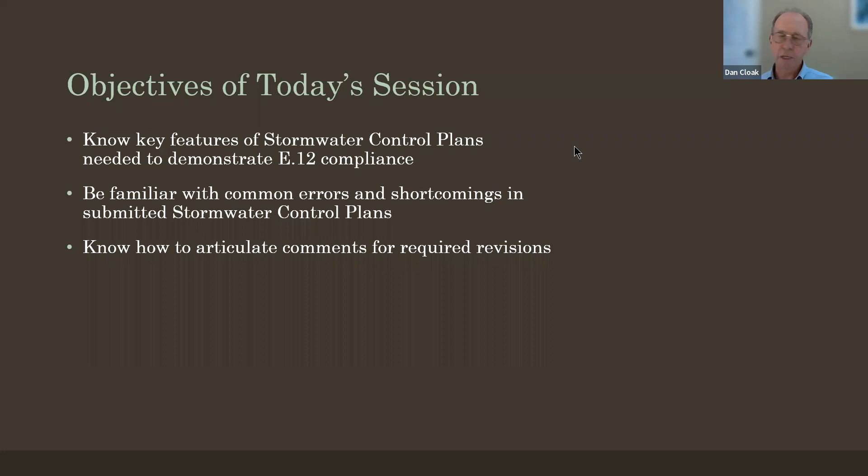So the objectives for today's session: basically know what to expect to get in a stormwater control plan, focused on what are the basic things that you need in order to be able to say, yes, this applicant demonstrated that they'll be in compliance with the requirements in provision E12. We'll review some of the common errors and shortcomings, things that we typically see that don't come up to snuff in stormwater control plans, and discuss some tips for articulating comments in such a way to ensure that they're addressed in subsequent revisions.

So with that, let's get into the manual and resources. And again, any questions that come up, just go ahead and pop that hand up. Someone will alert me that there's a hand, and I'll be glad to interrupt myself and answer questions as we go along.

So the post-construction manual used in all of the 4 North Bay counties was originally produced in 2014. A grant was obtained from the North Bay Watershed Association for the Bay Area Stormwater Management Agencies Association, and the original version of the manual was produced to cover provision E12 implementation, the phase 2 permit, which is in effect in the North Bay counties.

And it's pretty similar in most aspects, with some occasional significant differences, to provision C3 in the municipal regional stormwater permit for the phase 1 counties, which covers Contra Costa, Alameda, Santa Clara, and San Mateo counties. The chapters that are in the manual pretty much cover what's in the requirements.

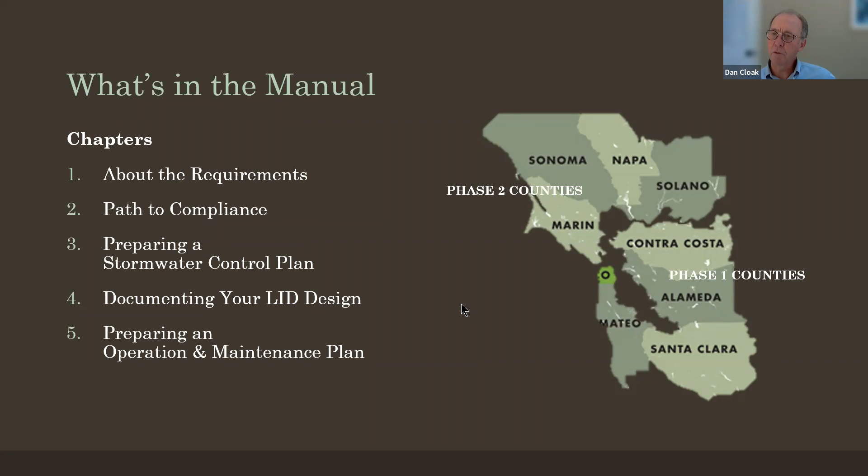Chapter 4 gets into the more technical aspects of how do you show what your LID design is all about. And then chapter 5 is operation and maintenance plan directions. So we'll go over each of those. Chapter 1, the key thing to know, there's really 2 tiers of requirements. For smaller projects, the requirement is to implement runoff reduction measures.

Basically, the 2 key ways of doing that are to disperse runoff to landscape, by far the most cost-effective and usually easiest way, and the secondary way, which sometimes works fitting it into a project site design, is to use some amount of pervious pavement for a walkway or a patio or a plaza. The method of getting to compliance is simply to follow the instructions in the template in Appendix C of the post-construction manual, the plan for a single-family home or small development project.

Larger projects, the second tier, are those that are not single-family homes and that create or replace 5,000 square feet or more of impervious surface. The difference there is that after implementing runoff reduction measures, any remaining runoff from impervious surfaces needs to be routed to a treatment facility, which is just about always a bioretention facility. So that's the key design and construction requirement.

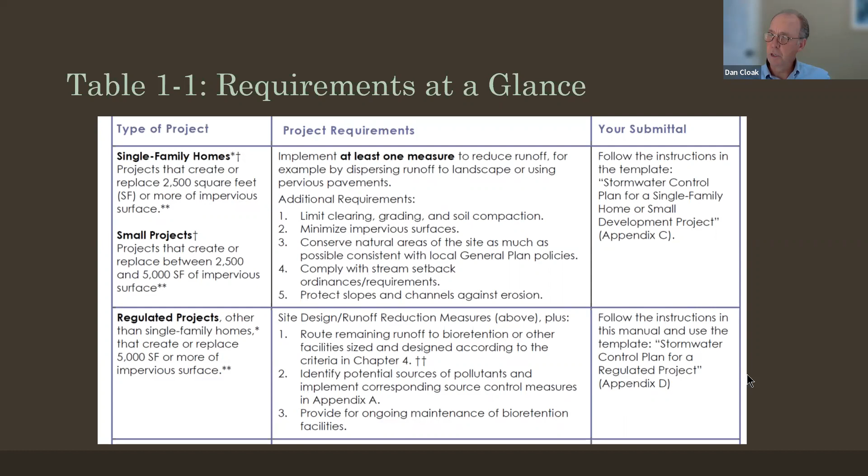There are also the requirements to identify specific pollutant sources and corresponding source control measures, and to describe how maintenance is going to be provided for bioretention facilities. And the method of getting to compliance there is to submit a stormwater control plan for a regulated project in Appendix D of the manual.

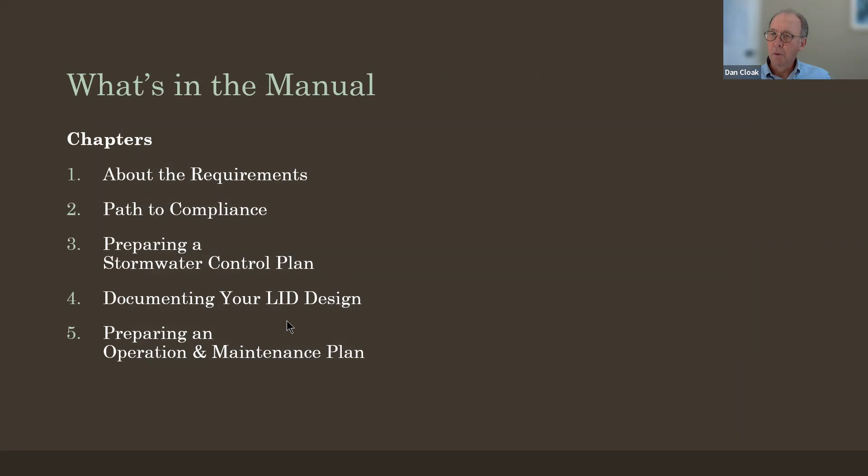Going through to chapter 4, documenting your LID design, the key aspect is making sure that the bioretention facilities are sized correctly, and not just sized correctly, but that there is enough preparation for planning to build these facilities the way they need to be built so they will function properly. The key aspect there is to make the top of soil surface of the facility flat.

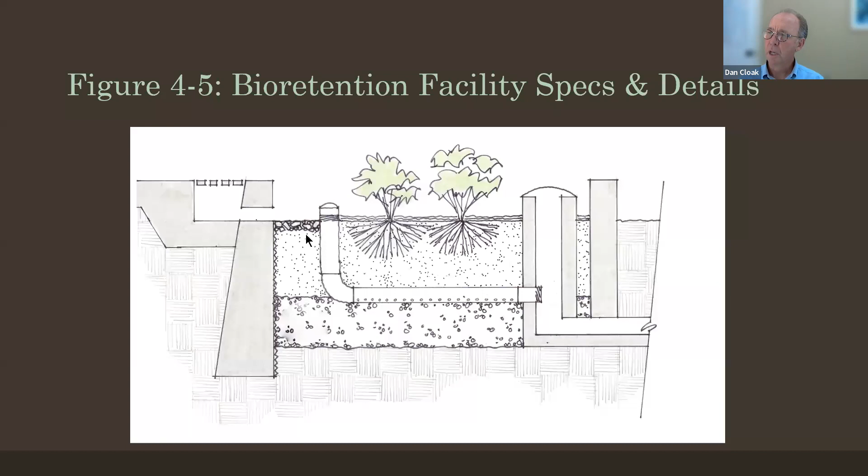This figure in the manual has the basic details and specifications required for that. It's intended to provide just enough information without being too prescriptive to ensure that these facilities function correctly. But at the stormwater control plan stage, particularly when you're first looking at the layout, the question is has the applicant thought through to make sure they've set aside the areas necessary to build these facilities and that they can build them flat.

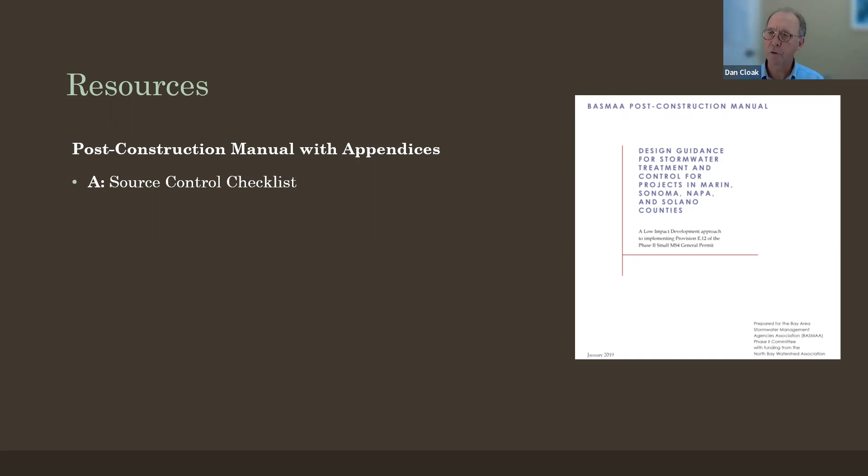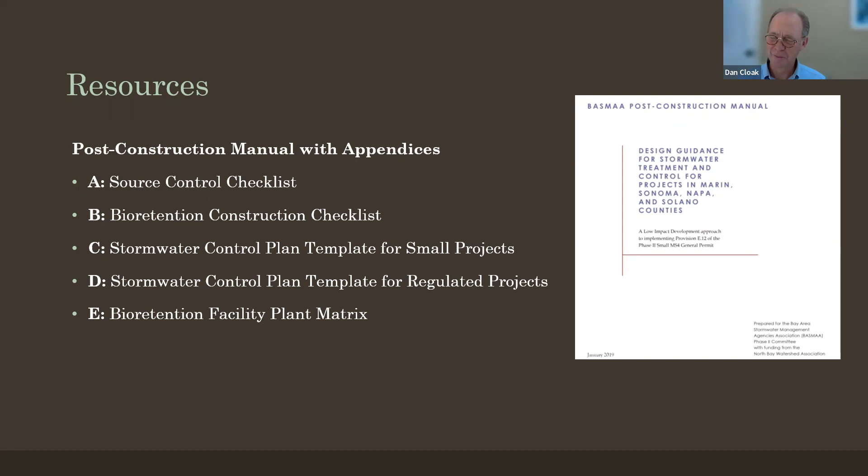In addition to the post-construction manual, there's a checklist that can be used to screen a proposed development site for potential sources of pollutants based on future uses of the site, and for each source, the source control measures that should be included in the stormwater control plan. There's a construction checklist to be followed while building bioretention facilities. There's the template for small projects, a template for larger regulated projects, and a plant matrix, and we already have a question about plants, so we'll be touching on that.

In addition to the appendices, there are resources downloadable from both the Napa program website and the Marin program website to help use the manual. There's an Excel-based calculator. I actually don't know how much that's used, but it's pretty handy. There's a couple of example stormwater control plans intended to provide the level of detail and additional insight into how to put together a stormwater control plan.

For the same hypothetical projects, there are example operation and maintenance plans. There are templates for the operation and maintenance agreement. There's some details on technical criteria for non-LID facilities for the very rare projects where those are appropriate and allowed. And there's an inspection checklist for bioretention facilities.

Do we have any questions yet?

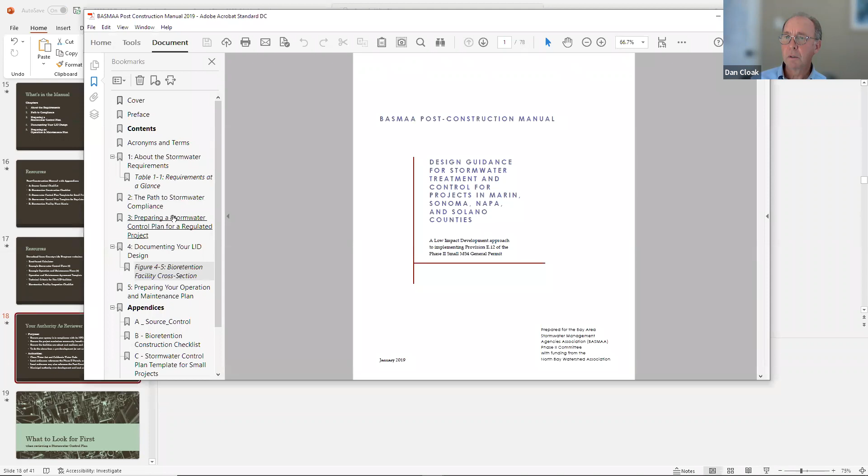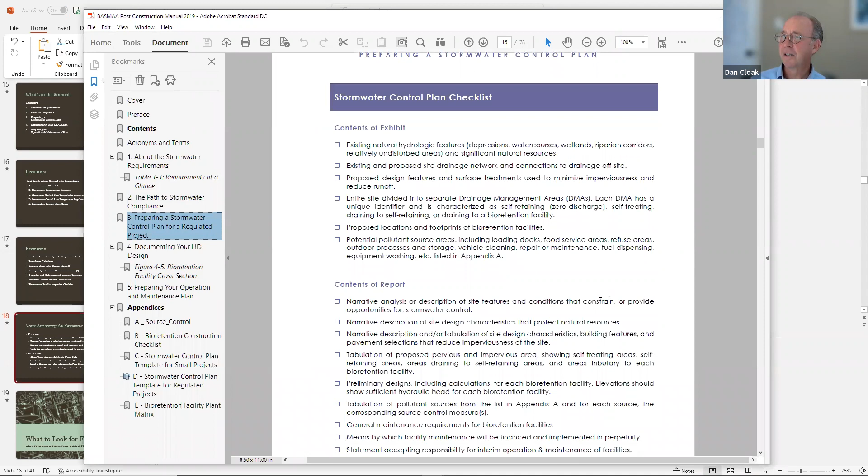Right, but I think there's a checklist for what's in the plan as well? Yeah, I think Appendix A is the source and source control checklist, if that's what you're referring to. Second here. Let's see here. Here, yes, this checklist. That's what I was referring to. Everyone see this? So this is on page 3-2 of the manual.

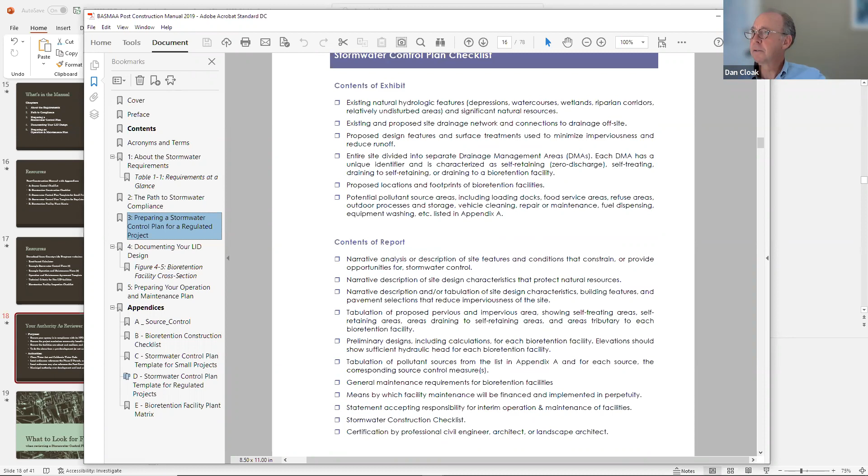And so these are meant to assist the reviewer in being able to identify whether each of these items has been incorporated. And what we'll get to in the next presentation is some kind of order of this, which things to look for first. I hope that answered the question. Is there a follow-up? If not, hopefully that individual will speak up and follow up on that question. Good.

All right. So I wanted to talk a little bit about this, and maybe we can even get into some back and forth on this, because this is kind of the toughest aspect of being a reviewer working for an agency: what can you ask for? How hard do you push? What topics do you push on? What is the scope of your authority? And of course, that all depends. It varies from municipality to municipality. It depends on the specific political and bureaucratic situation that you're in.

But I just wanted to emphasize here that the first thing that you're being asked to do, the definition of the job, is to ensure that when your agency gives approval of this application for a development, along with being in compliance with zoning codes and various other requirements, it's in compliance with your NPDES permit. And so by approving the project, that action is then in compliance with what's required in E12. But there's a lot more to that.

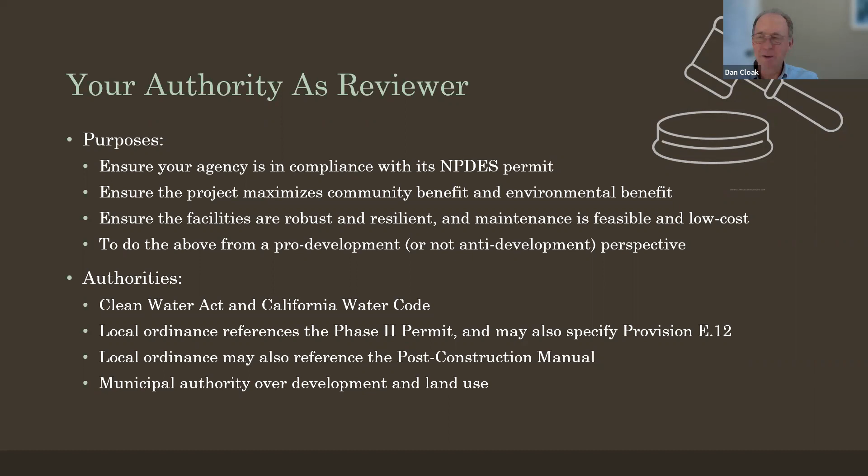Comments on that or questions? Anybody want to pitch in on that? All right. Again, I may come back to this more as we go on.

All right. So here's the section on what to look for first. And here's what I do when I open a stormwater control plan. I turn to the exhibit. So maybe on the way I notice whether they use the template, whether it really looks like what I'm expecting for a stormwater control plan. But the first thing I want to look at is their diagram in the back. And I'm showing here the exhibit that goes with the example residential stormwater control plan downloadable from the website.

One thing I want to note there is that this plan has I think 45 drainage management areas in it, and yet it still fits with all the information in a simple sketch on an 8.5 by 11. So a lot of the time I'll get some feedback from an applicant's engineer that it was just too complicated to break up the site into all those different drainage management areas. And yeah, maybe or maybe not.

Maybe it's actually pretty straightforward to do it if you organize your work well and are willing to spend a few hours doing it. I think entering this into the calculator as an example, it wasn't zero time, but it was doable within about 45 minutes.

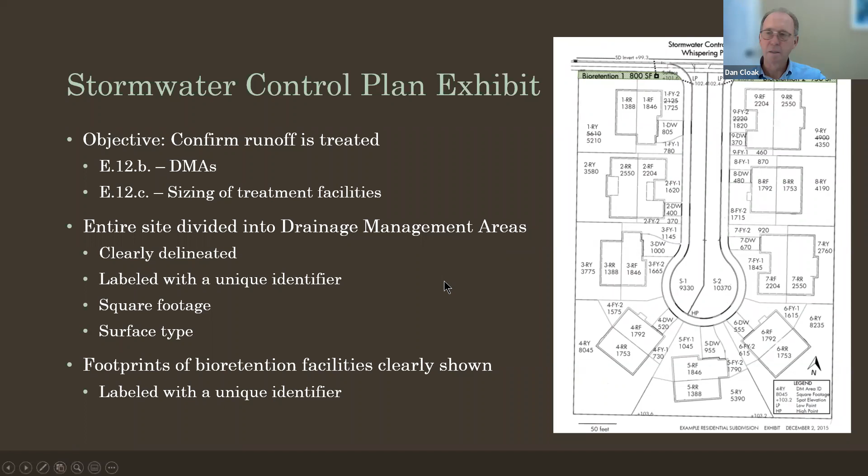Another thing I look for is: is there a fatal flaw? And this is really kind of the summary of what I'll see most commonly, where what they've come up with is not going to work, and it's going to require extensive revisions, even to their concept of what they want to do. And beginning with that is that they're not treating all the areas on the site. They've decided to do some LID, some treatment, but they haven't covered the entire site.

And a real tip-off to that, just something to watch for, is if you look at a grading and drainage plan and it shows storm drain inlets, it's kind of a tip-off that, hey, where are those going? Are they going to treatment? Maybe on a steeper hillside site, they have some kind of scheme where they're capturing drainage from roofs and pavement further up the slope, piping it down to the bottom of the slope where there's bioretention facilities. But that's pretty rare. Usually if you see a storm drain inlet, it's a problem. That's some area that they're indicating that they don't have a plan to treat. If there's an inlet, it should really be an overflow, and it should be in a bioretention facility, or maybe an area drain in a dispersal area.

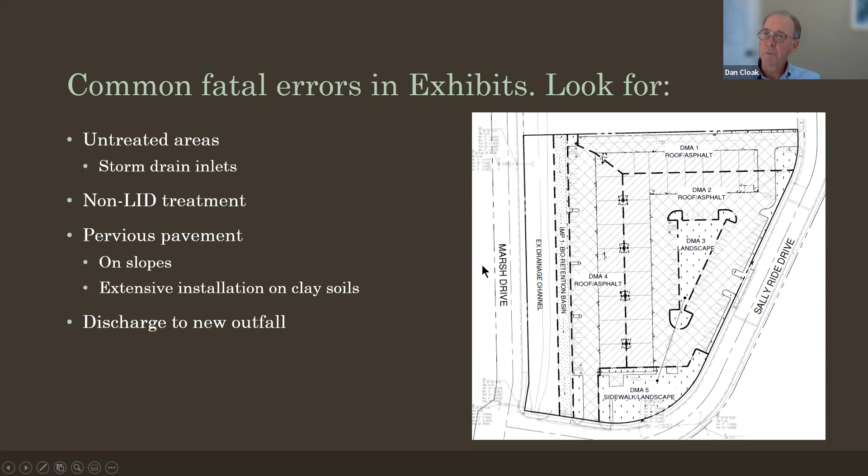So that's a typical shortcoming that will kind of cause me to abort further review after seeing that and focus on helping them solve that problem before I review all the detail in the plan.

This is another example that comes up way too often. I think what happened here is that someone had a subdivision map that they'd gotten approved a long time ago and were coming back to try to build this subdivision, and of course don't want to move the lines around or create anything new. But for various reasons, they were subject to C3 and couldn't be grandfathered for that. So they did have to do the new development requirements. And so their answer was to take a corner of the lot, which was originally intended for a flood detention basin, and put a bioretention basin and a flood detention basin in the same little area.

And just eyeballing this, if you've been doing review of stormwater control plan exhibits for a while, you can glance and say, that's too small for that whole site. That's not going to work. So that was part of the problem. And then the other problem is the only way to do this was to have piped drainage, as you can see, that would drain both the streets and the lots and discharge that into this flood detention basin. And then their idea was to simply put the bioretention basin at the bottom of the facility. And that just is not going to work from an operational point of view.

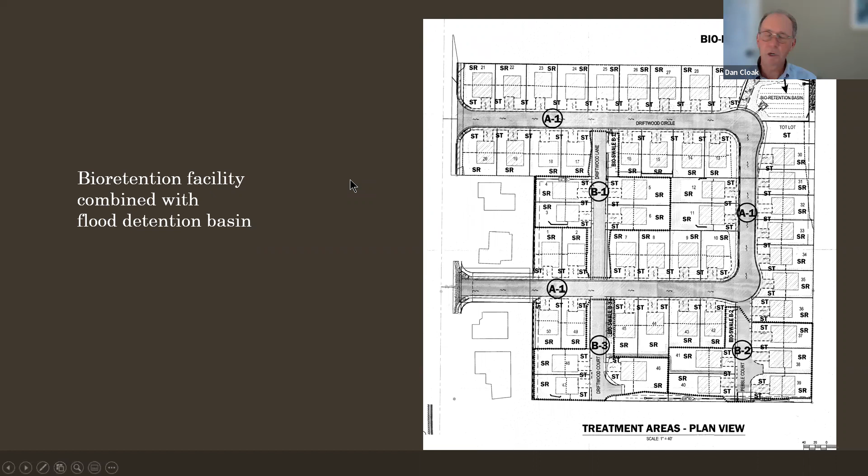Again, this is one of those cases where I was like, yeah, you may have at least come close or have some kind of argument for why this would be in compliance with the NPDES requirements, but it's not something that we're going to allow you to build because you can't get down there to maintain it. It's ugly. You're going to have to fence it. It creates a safety hazard, and this is just not a workable plan. We're going to have to back off and figure out how to work with the engineering before we can complete the stormwater control plan.

The next thing that I would look at, sort of screening a stormwater control plan for fatal flaws, is making sure that, assuming that we do have the drainage management areas shown correctly on the exhibit, bioretention facilities are shown on the exhibit, that they've tabulated the drainage management areas, shown the facilities, that they've represented what's shown on the exhibit in the calculation, and that the calculations, at least without going through and doing them over again, are laid out in a way that makes sense.

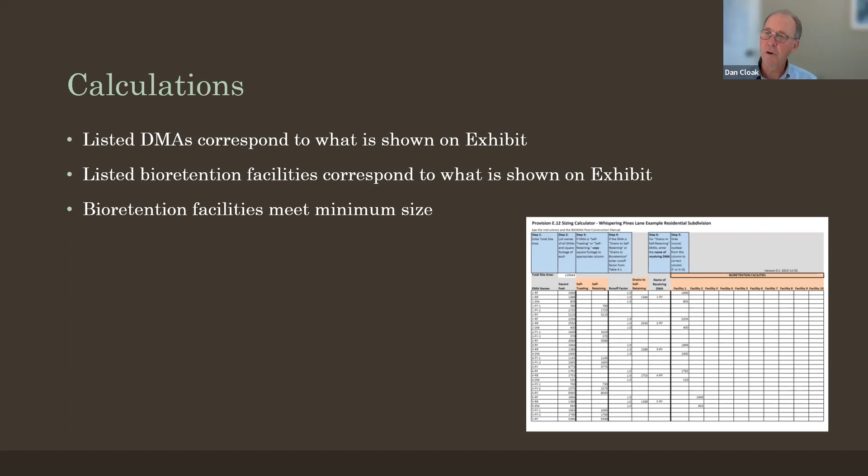So that's it. Any questions on that section on what to look for first? Anyone want to share what they look for first? Dan, I always check to make sure they're referencing the right permit. Yeah, right. At least they know what their requirements are.

Dan, we had a question earlier that said, what can be added to the plans to ensure the drainage area is actually drained to the facility, especially with pavement? Is there something you look for as an easy way to see on the plan how that's delineated? I would say that that is a common problem. I think I know what the questioner is getting at: you see the drainage management area, you see the bioretention facility. How is the runoff getting from point A to point B? And if it's not obvious, I will certainly ask. As you get into the more detailed step-by-step review, I would be looking for an explanation of that if it is not clear.

The concern is that if there isn't any obvious way, for instance, that water is being moved from a roof across a parking lot to a facility on the other side of the parking lot, they are putting that in a pipe to go underneath that parking lot and then discharging it into a facility that's on the other side. And then you have the depth of the pipe and the slope of the pipe going across the length of that parking lot, dropping as it goes, and you will end up with a facility top of soil elevation at some depth below where the parking lot is, and that is going to cause all kinds of problems, because one thing we don't want to see is our bioretention facilities down in pits.

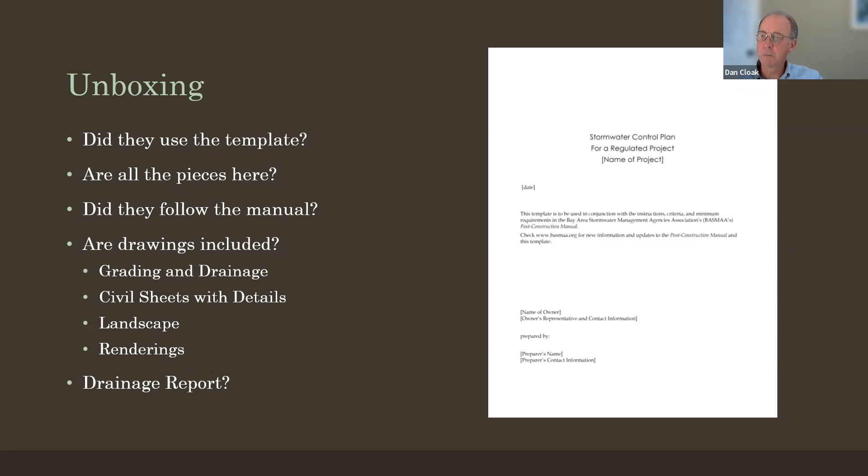And then finally, the last thing, just pulling the thing out and looking at it for the first time, I see a lot of stormwater control plans that for some reason are trying to combine it with a whole hydrology report, which is not necessarily fatal, that you've got information that you don't need and that doesn't really apply, but often they get muddied together, and the applicant's engineer is trying to solve the problem of showing that the peak runoff from the site will not damage downstream facilities. At the same time, they're trying to show NPDES compliance and turn it into a model. So that's the first things that I look for.

By this time, I will have looked at the exhibit with the drainage management areas and the bioretention facilities, the calculations. Next is the project data form. One thing to look at right away is: is there congruence between what's shown on the exhibit and what's shown on the project data form in terms of the new and replaced impervious area? And particularly if you have a project where a portion or all of the site is being redeveloped and you're trying to figure out whether the 50% rule applies, then you need to make sure that what is put in these boxes for the new and replaced impervious area, the pre-project and the post-project, is accurate.

And this is a case where I often find that if a project has been revised, it's gone through a couple of iterations before they turn over the stormwater control plan, often there'll be some old version of the numbers in here, and it'll be misleading, and you'll need to send a note back and get that straightened out. Hey, Dan, can you clarify the 50% rule for the folks that may be sitting through this kind of training for the first time?

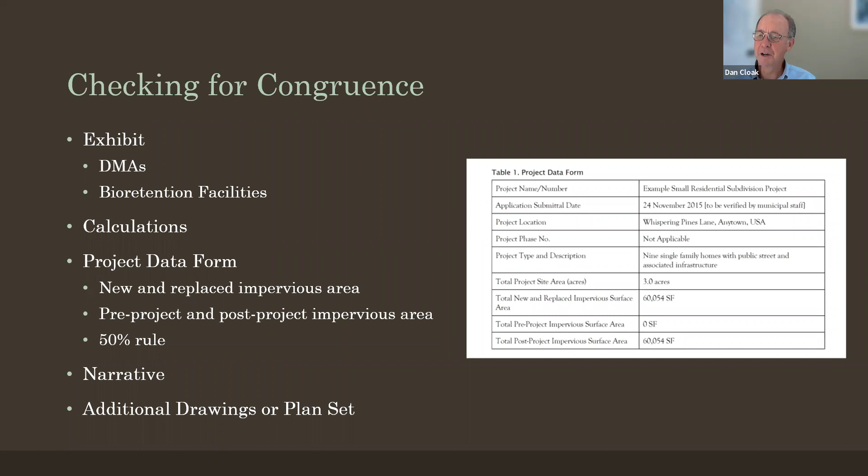And then often if someone has submitted additional drawings, it's a really good idea to check and make sure that the grading and drainage plan and the stormwater control plan line up and are showing the same thing. I read through the whole thing beginning to end after I've done that first check. I mark it up as I go along, because if I don't do that, I forget stuff.

Often at this point, you can see if there's something going on in the explanation of what the project is. If there have been iterations of the project, if the stormwater control plan was prepared earlier and then something changed, you'll get contradictory claims or compliance strategies. You'll get something suggested in one place. And often that's something you can just straighten out by asking a few questions, but you certainly don't want to let the stormwater control plan go through having stuff that's not internally congruent.

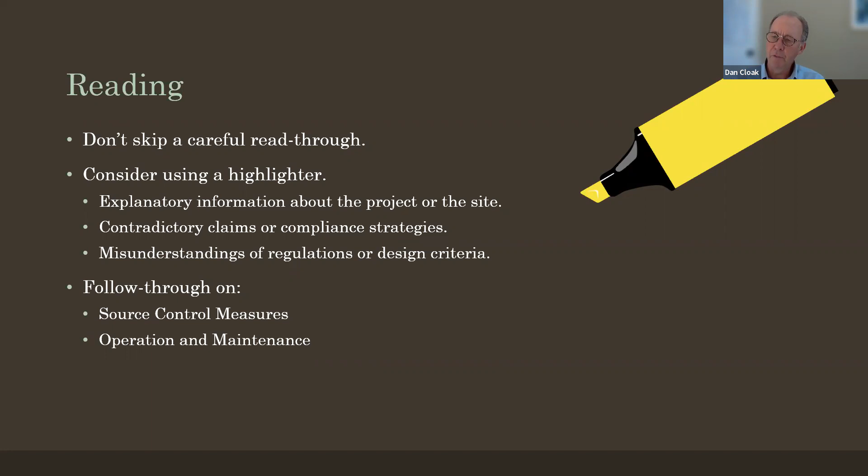Often there's misunderstandings, which is another reason for requiring a narrative, and another reason for reviewing it carefully: you can tell that the applicant's engineer just didn't get something, and this is the opportunity to tell them that and follow up on it. Including highlighting, following through, making notes, and checking up on making sure that they follow through on their source control measures and their O&M.

So when I write a review letter, if I get to the point of writing a review letter, and I was saying sometimes you sort of stop the process early because it's not going where it needs to go yet, I try to number the comments and keep issues distinct, and that really helps organize the process of making sure that each issue has been responded to.

I really like it when I can reference the specific place in the manual and/or in the permit. And this sort of takes it away from saying, this is my opinion, this is what we like to see. Anything that has to do with my views as a reviewer, I'm probably more susceptible to that than some, having worked in the field a long time and authored the manual. But it's really helpful if you can say, yep, page 4.6 is where it says this is required, and it isn't here.

And then this last one is kind of hard because it really comes down to this issue of extending your authority, your role as a reviewer, to go a little bit beyond just saying, oh, passes, doesn't pass, good enough, NPDES compliant, not compliant. Try to get in there and help them out. I'm careful to word things in such a way not to say this is what you have to do in order to comply, but at the same time to say what you have there is not in compliance.

But our history is not to require too much additional engineering than what might be required anyway before a project goes for design review or planning commission review. But to the extent that a preliminary grading and drainage plan is required, and a landscape plan is required, you can look and make sure that those line up. It's helpful to get those and review them in the context of the stormwater control plan. Questions on that section? Discussion?

So Dan, there was a follow-up question on the 50% rule. Would the 50% rule apply if you are replacing impervious surfaces, such as if you're taking a parking lot and converting it to housing, for example? Yes. If you have an acre of parking lot, in this case you'd be replacing impervious area that exceeded 50%.

So you've got an acre of parking lot, and you put 3/4 of an acre of building on it, you are required to then do the remaining parking lot as a retrofit. Does that make sense? Did I get that right? But if you were replacing less than 50%, then you wouldn't need to, correct? Right. So if you had an acre parking lot and you've got a 1/4 acre building and the rest is being left there, then you would only be responsible for doing the building.

Okay. I hope that answered the question. We can get into it more in the discussion if we need to. Let me get through this section on maintenance, which should have some perspective and information, and then we'll get to the break. If not exactly on time, well, we got 3 minutes, so maybe just a few minutes late. And I'll do a 10-minute break and then shorten up the discussion just a little bit.

So I was asked, I think we had some feedback when we were putting together the plans for this session, that folks wanted some information on maintenance for bioretention facilities. And the key thing that I think is essential to get across about bioretention operation and maintenance is that if your design and construction is right,

that maintenance is, in the first place, minimal; it basically just requires maintaining the vegetation. And in the second place, even if you don't do it and the vegetation kind of looks like heck, you still have a working bioretention facility that's quite effective.

The converse is true: if you have a problem, particularly certain problems in design and construction, and you go out there and do your maintenance inspection, you're going to find every time you go out there that it's not functioning properly and that there's not necessarily a maintenance solution to it. So these 3 pictures sort of give the beginning and end of that.

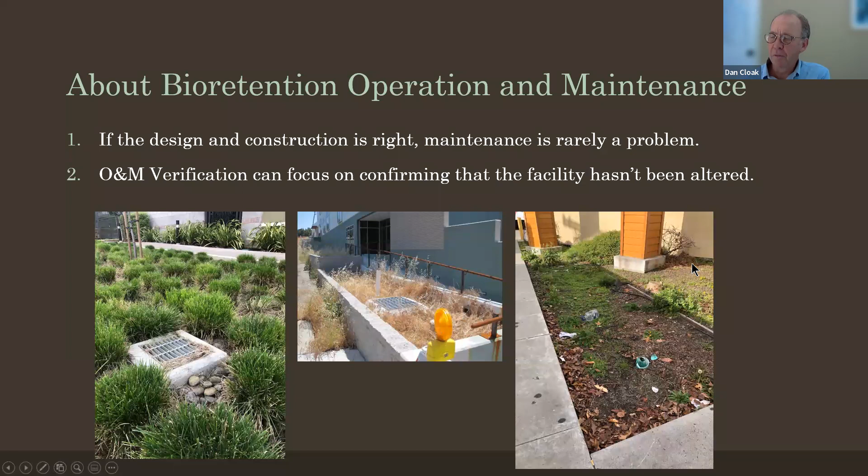Then again, if it had been built with one of these instead of this, it would be functioning a lot better despite the lack of maintenance. So that's sort of my spiel on the relative significance of design and construction versus maintenance.

And just to follow up on that, each of these criteria that are in figure 4.5 and 4.6, all of those are really about ensuring robust, resilient operation. So when you go out there for those O&M inspections, your facility is going to still be operating correctly because it was built correctly. So all of the criteria that are there are there to ensure long-term operation and maintenance.

And really the only one of these that you're likely to be doing much about is the condition of the plants, and then to make sure that none of these things have been altered in some way, that nothing unfortunate has happened to the facility.

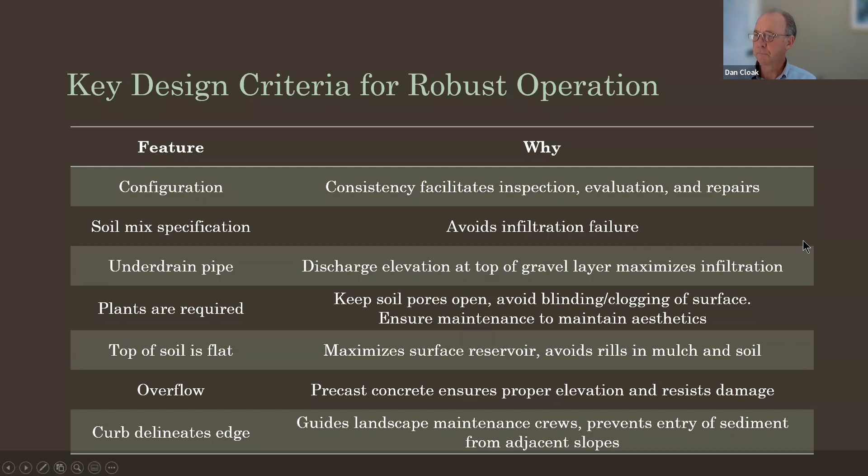And then in the stormwater control plan, there are some parameters that are pretty critical. I think it's important at this stage, even before the operation and maintenance plan is completely written and they're just submitting to get planning approvals, that these key things are in there, and I think they're in the template and other materials that should be mentioned.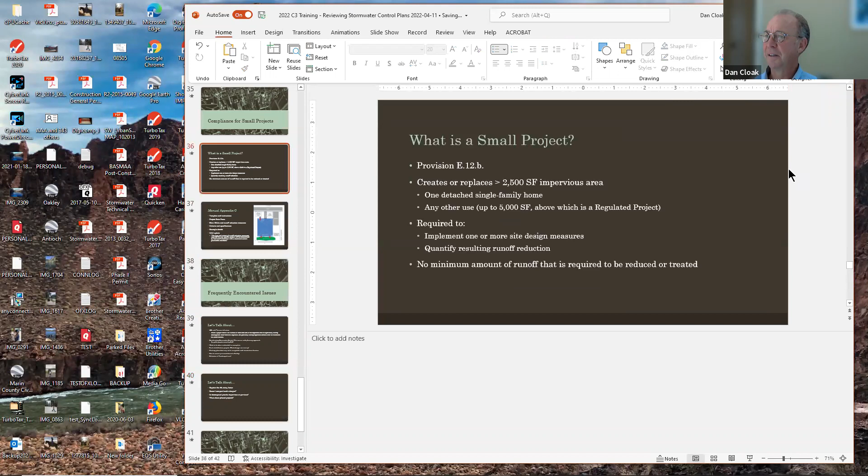All right, folks still here? Shall we continue on? Say, yep. I love this. Right. Everybody still with me? Let's talk about small projects. Let's see. Yeah, well, I'm getting a forest of thumbs up. Great. Thank you. Man, will I be glad when we can do this in person again.

Let's talk about small projects. Actually, how many folks out there, if they could hit that thumbs up button, would say that the majority of the reviews that they need to do are small projects? Yeah, so a lot.

So a small project, the threshold that the state water board created, was creates or replaces 2,500 square feet of impervious area or more. That applies to projects between that threshold and the 5,000 square foot threshold, which is a regulated project for anything except a single family home. For single family homes, they can be as big as you want. They're always a small project if they're more than 2,500 square feet, even if they're 10,000 or 20,000 square feet of impervious area under the current requirements.

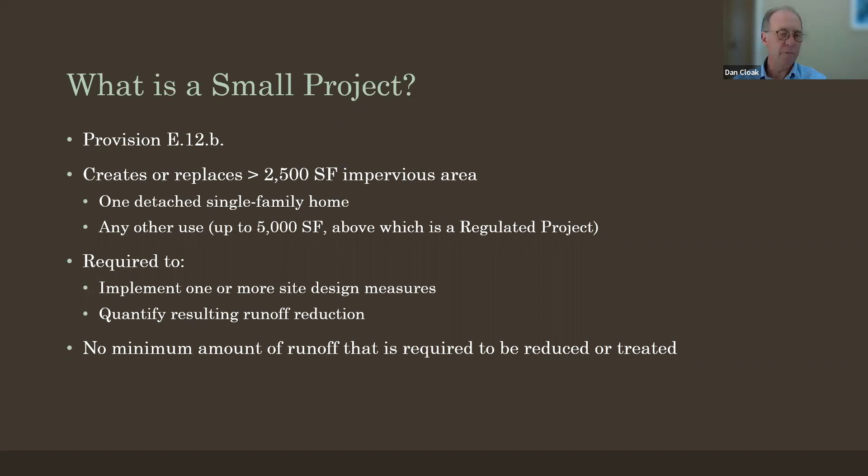And in this 2019 update, the collective decision was made to add this language to say that the type and extent of runoff reduction measures required for any specific project will be determined by local staff, again, going back to the authority that local staff has, consistent with a maximum extent practicable standard.

And there's nothing in the permit that requires anyone to do that, but if we're implementing the permit and we're trying to do what we can for water quality, and we're trying to ensure the best kind of projects in our communities, that's reasonable. And maybe the discussion that we need to have is how do we determine whether a particular proposal meets that maximum extent practicable standard or not.

Does anyone want to chime in their thoughts on this at this point? Their experience with it? I think we probably have a lot of people here who've dealt with this issue at some point or another.

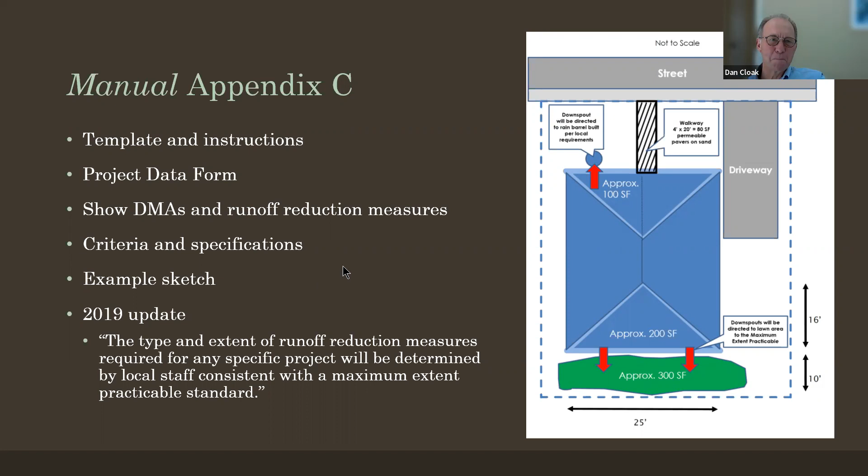Okay. Well, let's move on then to our frequently encountered issues. I took these off of the chat while we were in the break. And actually, I wanted to straighten this out because I think I probably misstated the 50% rule, so I wanted to jump on that first. This is what it says in table 1.1, in a footnote, and I'm almost positive this is quoted directly from provision E.12.

Where a project results in an increase of more than 50% of the impervious area of a previously existing development, that's when it applies. Runoff from new, replaced, or previously existing impervious surfaces must be included, and there's this proviso in the permit that says to the extent feasible. So that is a great out for situations where it's very difficult to do so. But the main thing I wanted to clarify is that this comes from a comparison of the pre-project condition to the post-project condition, and whether the impervious area is increased by 50% or more.

So Dan, to clarify, in the example you gave, if there was a 1 acre site being redeveloped and it was only 50% impervious at this point, and they were replacing all 50% of the impervious, but not doing any more than that, then it would not trigger the rule. Is that correct? Yes, it would not trigger the rule in the North Bay. It would trigger the rule in the South Bay, but we're in the North Bay. Okay.

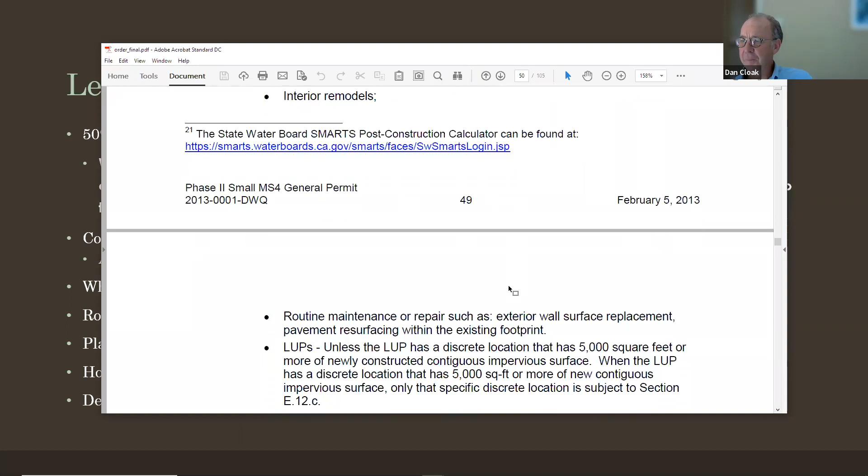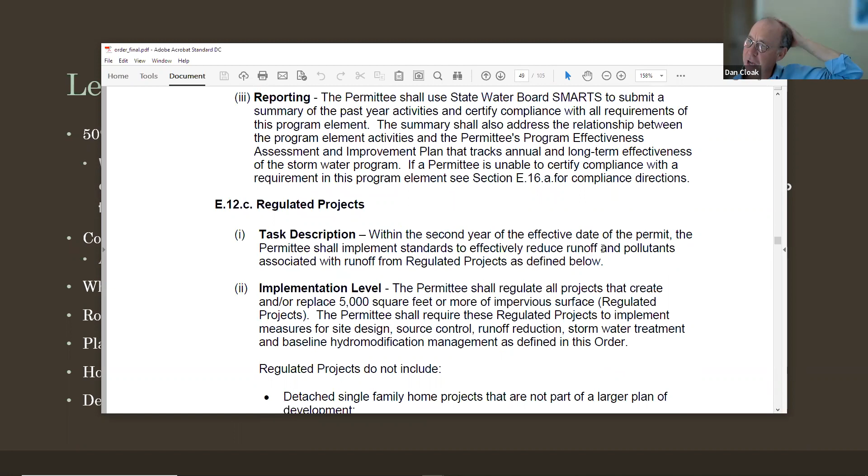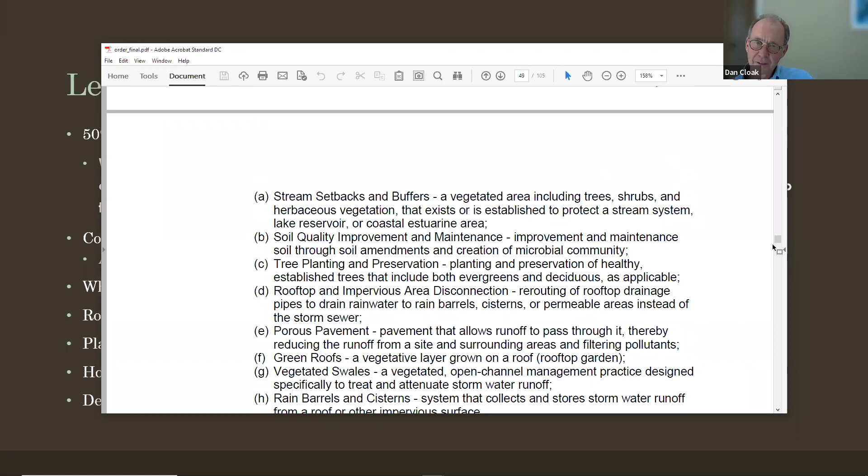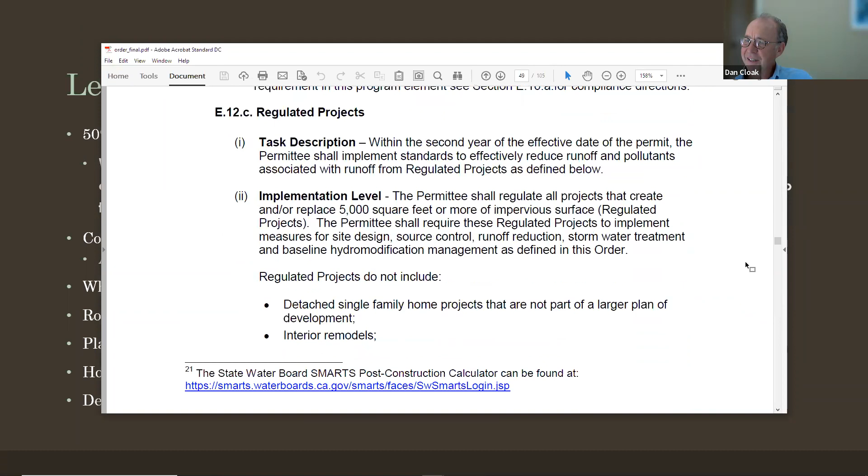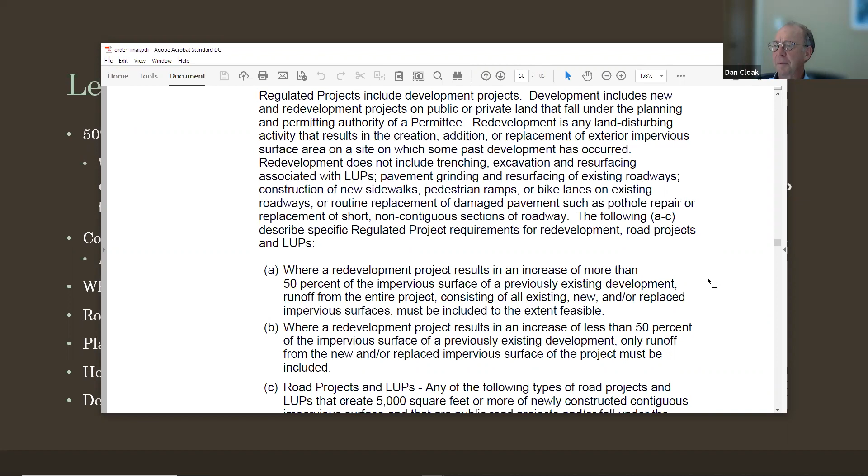Yeah, it was a bit of an intersection of the construction and the post-construction requirements, Dan, so maybe a little tangential. The project had planned to incorporate low impact development. So that was a good thing. But we had firmly believed at the county level that this was not going to trigger the state's construction requirements. And the QSD actually put their foot down and said, this is clearly a construction project. So in that case, we had an over-aggressive QSD.

Right, but that was on the construction. Yeah. Fortunately, the county had already planned to do the LID features. I think there had been some separate money made available for that. So we had the leg up there. No, sorry, opposite. We had planned to do the construction stormwater plan and then took it out at the last minute when we bid the project, or tried to take it out when we were in the middle of the project. The QSD put her foot down, and then the LIDs we determined were not necessary in that case.

Yeah. Sorry. No, thank you. You're refreshing me. It's been a while. It was a convoluted project with a lot of moving parts, yes. But I think that's pretty typical of these county and municipal projects where you're making decisions on available information as you're moving through the design process, and then suddenly your assumptions get upturned. Yeah.

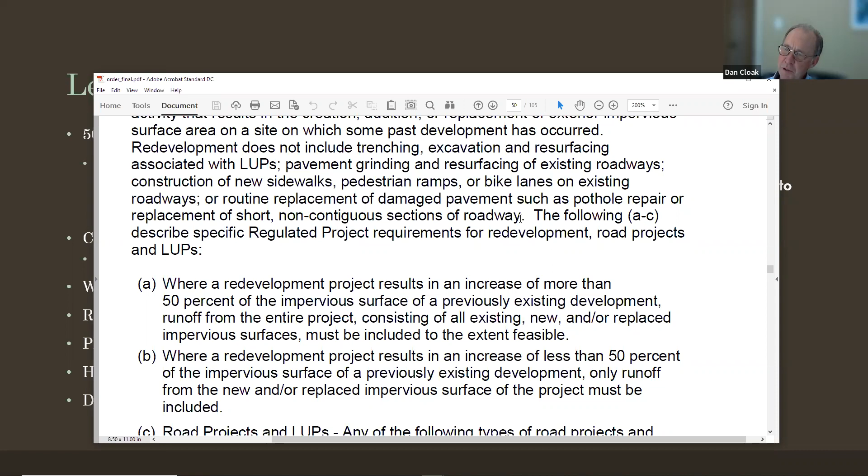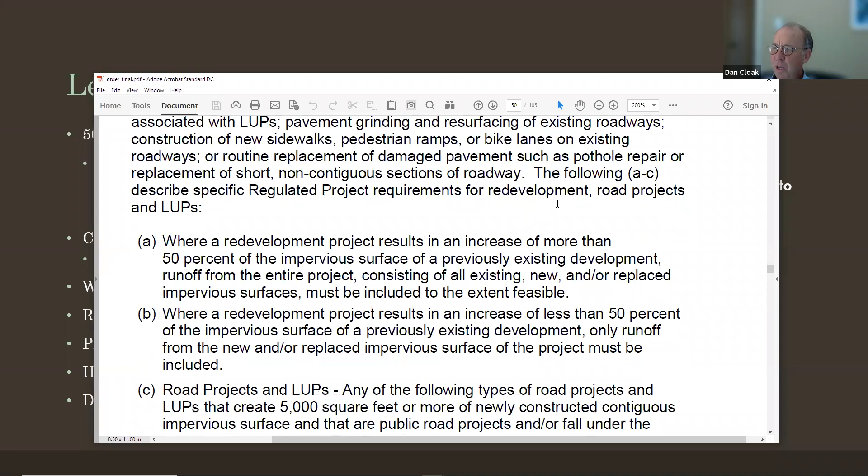Yeah, this language right here that I have up, where it says does not include trenching, excavation, and resurfacing associated with linear projects, pavement grinding and resurfacing of existing roadways, which would seem to cover pretty much, or routine replacement of damaged pavement such as pothole repair or replacement of short non-contiguous sections of roadway, which then raises the question about what's meant about replacement of long contiguous sections of roadway. But it's vague enough that it doesn't seem to have the teeth that would bring in almost any kind of road project, unless it was actually a new project.

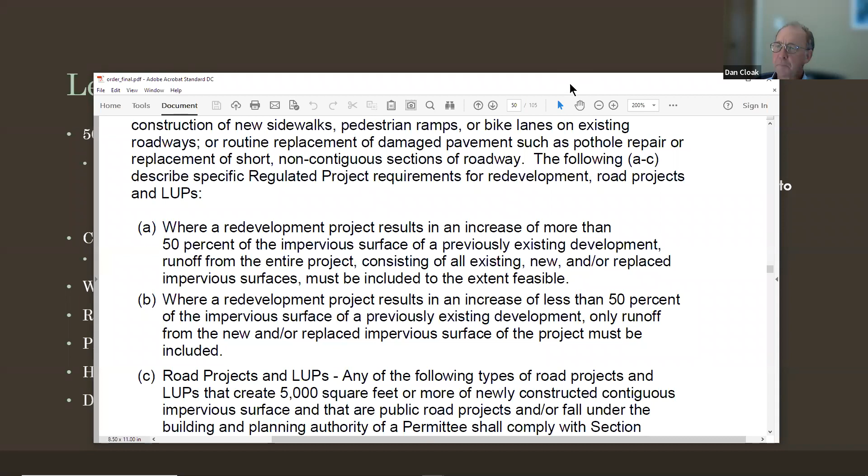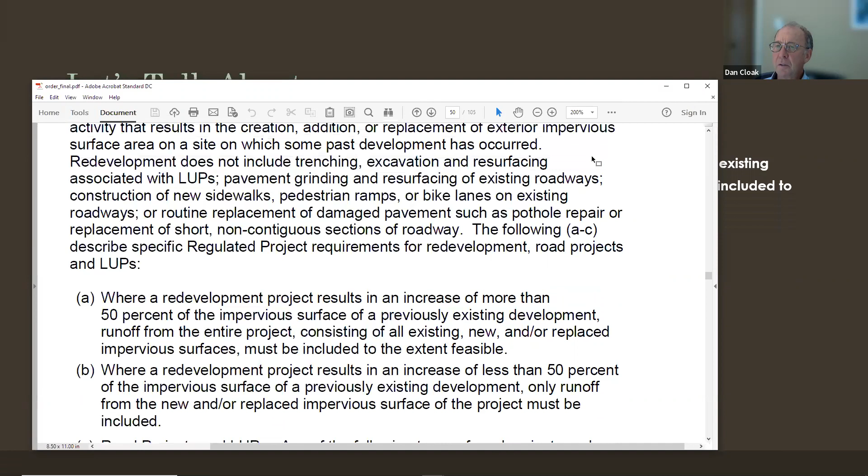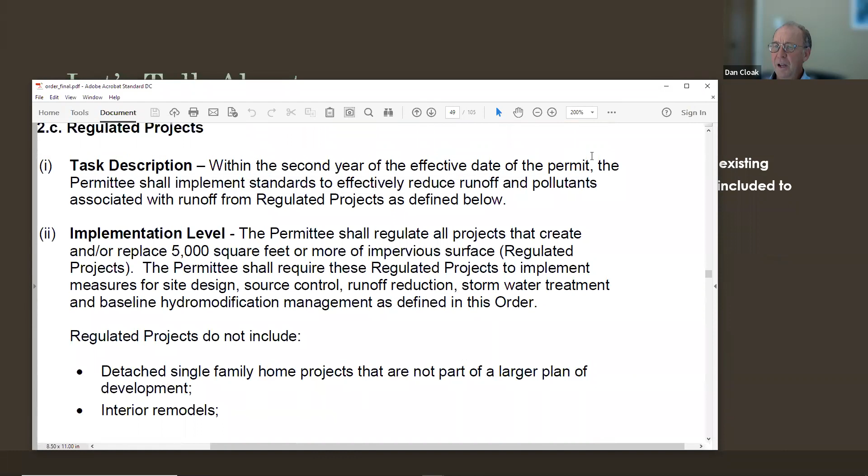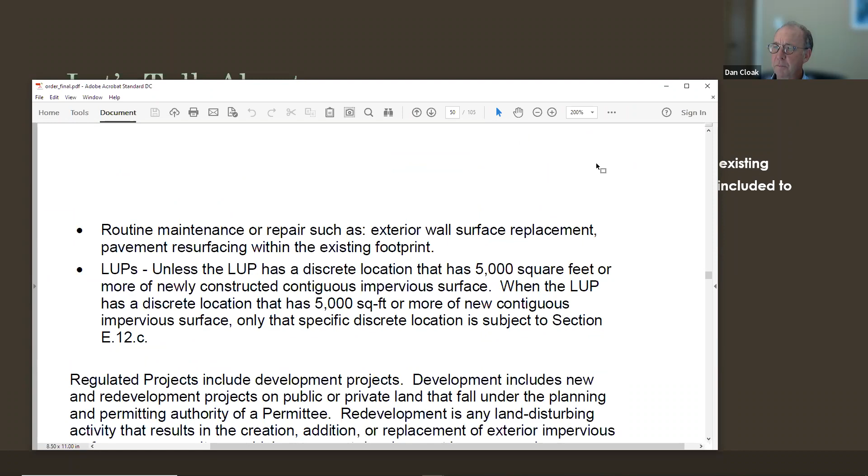With a note that these being public road projects, as opposed to parking lots, which are not covered under this caveat. Right, yeah. And then under parking lots, I think you're left with that question about whether it is pavement resurfacing within the existing footprint, or whether it's replacement. So it's subject to interpretation.

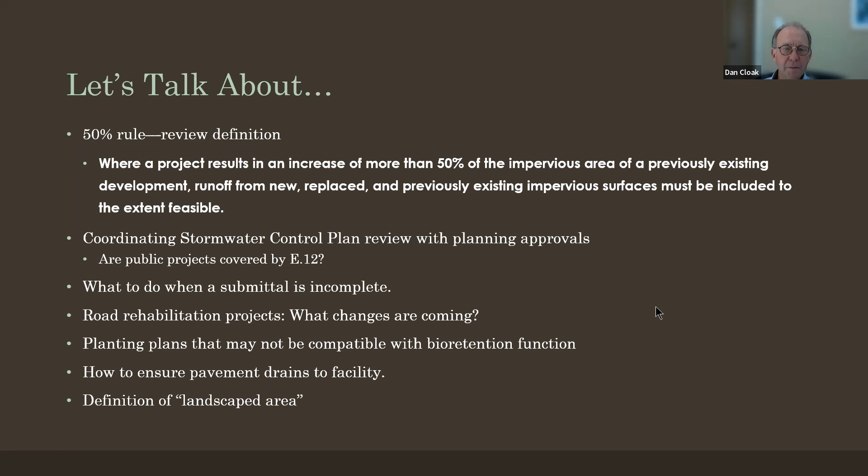How are we doing on time? Do we still have a few more minutes? There's a couple of additional comments or questions in the chat, Dan. I don't know if you've seen them, about semi-rural areas and roadways for emergency egress. But yeah, you got them. Do I? Does somebody want to get on and clarify either of those? Erica, you want to unmute and ask your question about CAL FIRE?

Hi, Dan. It's really nice to meet you. Hi. I'm really just conflating two fields that are really kind of intertwined in my background here, which is fire recovery. Forgive me, I think my audio is right here. So essentially, there seem to be a lot of habitat areas that are getting cut through with roadways, which to me seems like a potential for erosion and degradation, especially for transport of pollutants like soil particles, essentially sediment transport.

And so I was curious if you may be experiencing this in the South Bay, like near Pacifica or towns like that, that are calling for routes of egress through like Golden Gate National Recreation Area down there. And then up here, we're just seeing it a lot because there's typically only one way in and one way out, which is leading to a lot of fear around egress during emergencies such as fire.